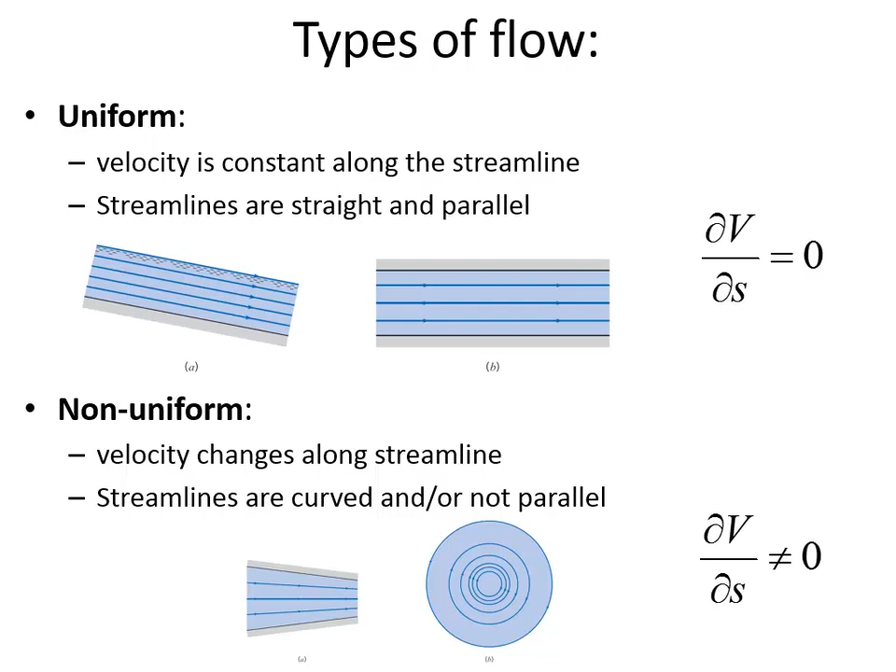Okay? Some of the lessons we learned about steady versus unsteady flow still apply here in open channel circumstances, where steady flow is the...

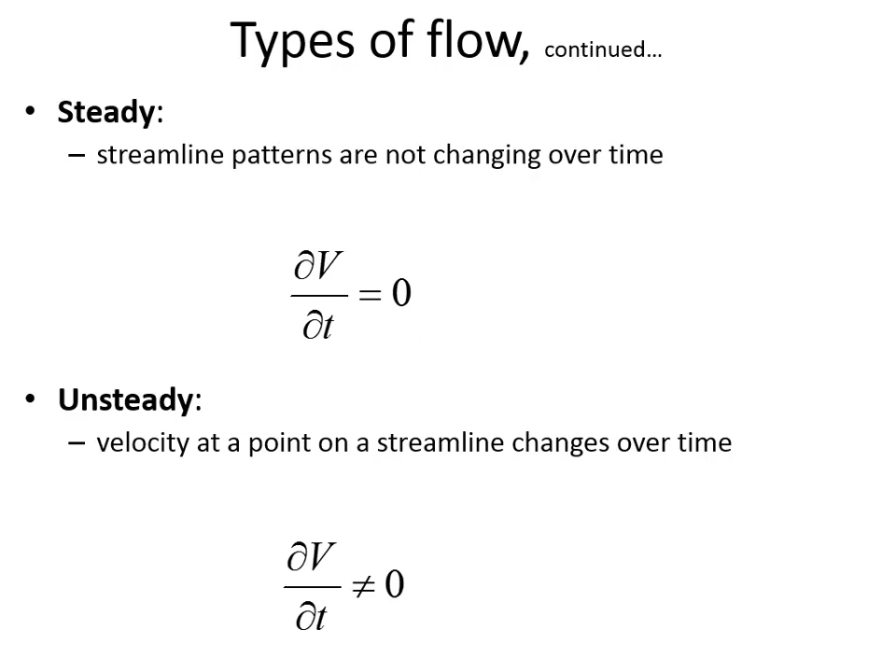constant flow with respect to time, meaning that the velocity is the same, the depth is the same now as it will be at some point in the future. It means the flow rate is steady, things aren't changing over time, versus unsteady flow.

So here's an image that depicts, for open channel, the difference between the flow condition at the beginning of some interval where a culvert's starting to be washed out and the road above the culvert is starting to collapse into it.

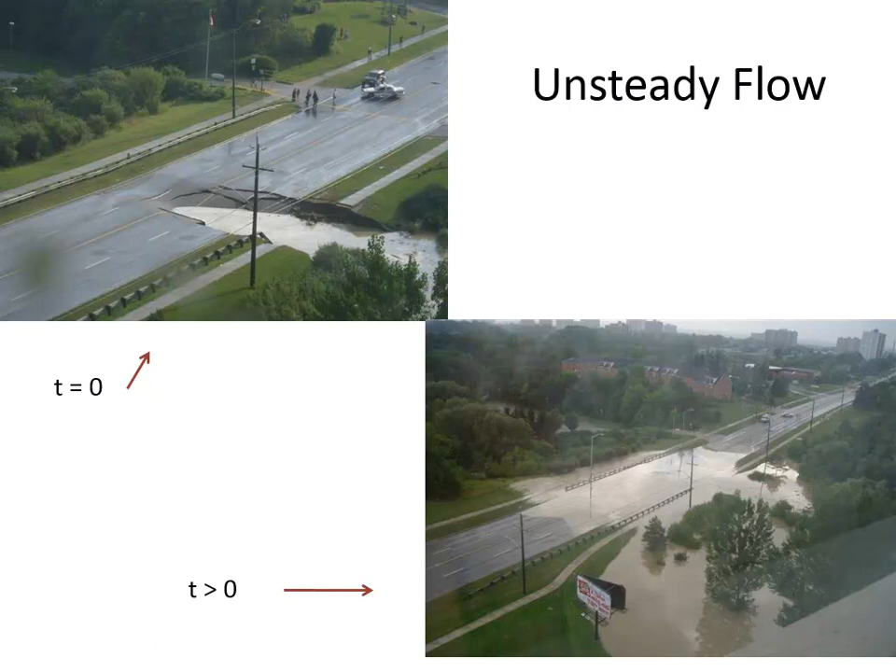And then sometime after that event, after the water has completely damaged the bridge and there's no more pavement going over there. So unsteady flow means that the flow conditions changed over time.

Now channel types - there's a couple of different channel types, and the first of these is prismatic. In a prismatic channel, the cross-section is regular. It's easy to characterize because usually it has some sort of a shape we're already familiar with. A rectangular channel is prismatic.

Now compare that to a non-prismatic channel, where you do have variations in any one of these or in all of them - variations in the shape. Think about the Ohio River and how there are little islands at certain spots and the depth is changing. At one section it may be deeper than the other.

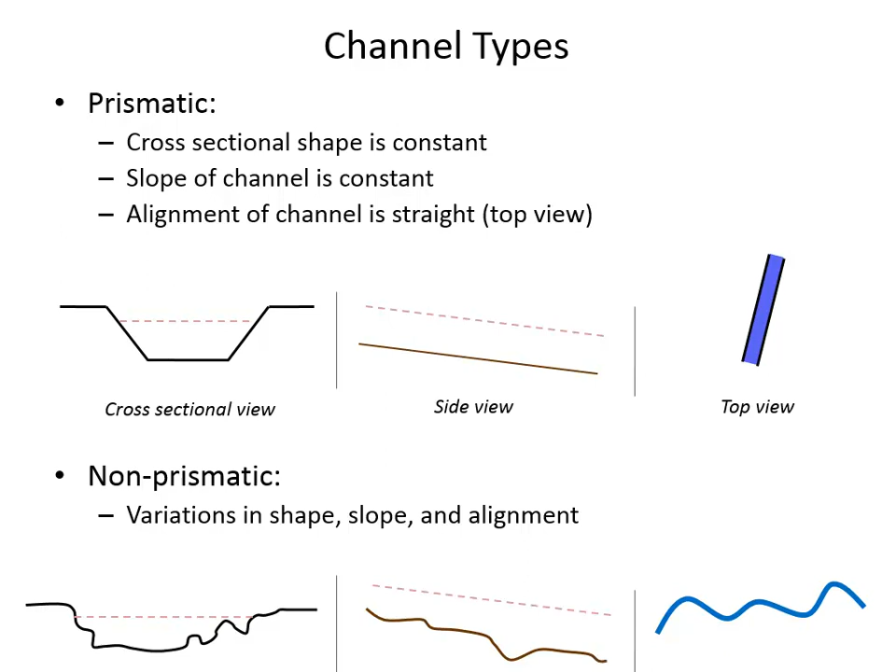For a rectangle, obviously, it's going to be the width times the depth. We've worked with trapezoidal geometry before, and we've talked about how the side slope of a trapezoidal channel has this parameter t, where t is the horizontal component of the side slope, where 1 is assigned to the vertical component. So if t equals 1, that means the side slope is at a 45-degree angle.

Some of the more challenging geometries to work with would be a circular conduit that's only partially full. We will get to the geometry of a circular, partially full conduit when we're doing sewer design, because if you think about a sewer pipe that's circular, it's not always full - in fact, it's very rarely full. It's extremely bad news if the pipe's all the way full in a sewer, because it means the pipe is pressurized, and a pressurized sewer pipe is going to leak backwards into people's basements and yards. So the geometry of a circular, partially full channel is hard to deal with, but we'll get there.

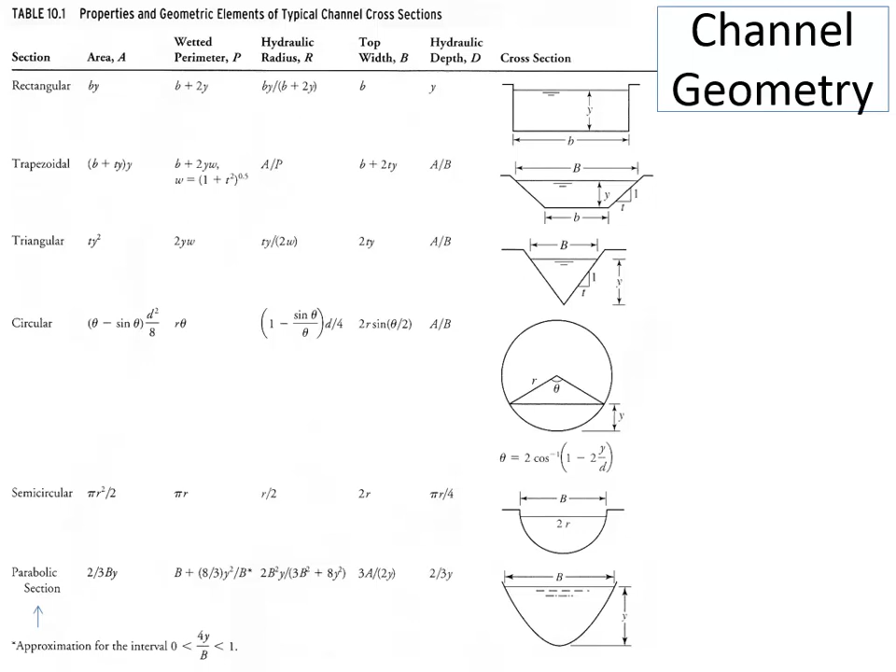So if you said that there is a trapezoidal channel, usually it would say the channel has a 1 to 2 side slope, and they may not even say which is the 1 and which is the 2. It would almost go without saying that 1 is the vertical and 2 is the horizontal, because you wouldn't have a trapezoidal channel that's really steep with a 2 to 1 ratio. Especially for a soil-lined channel, that would simply be too steep. So vertical, horizontal, where T is what we are calling the horizontal component of that side slope.

Okay, so what did we talk about? Ways to classify flow: we classify flow as uniform or non-uniform, as steady or unsteady. We can classify the flow going through a channel as prismatic or non-prismatic. Previously, we've already learned about laminar flow versus turbulent flow.

And you can do the same thing in open channel flow, classifying it as laminar or turbulent. So consider a stream where... I'm very proud of the sequence of animations here. It took me hours a couple of years ago, but still, it took me hours. So tell me it was worth it.

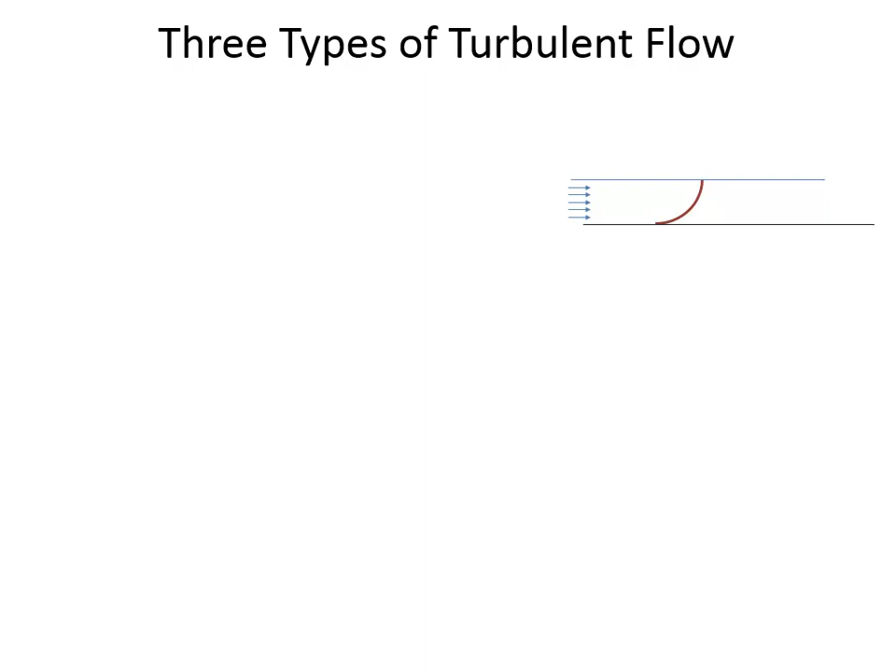And the Reynolds number below 2,000 means we've got a laminar zone. So why is it that we have a laminar zone close to the stream bottom? Because it's held back. That's the key: the velocity is low at the bottom of the channel because that's where the resistance is. The further away you get from that resistance as you go up through the channel, the higher the Reynolds number gets. At the bottom of the channel, the Reynolds number is 0, because right at the very bottom the velocity is 0. But you can go up some distance and still have laminar flow.

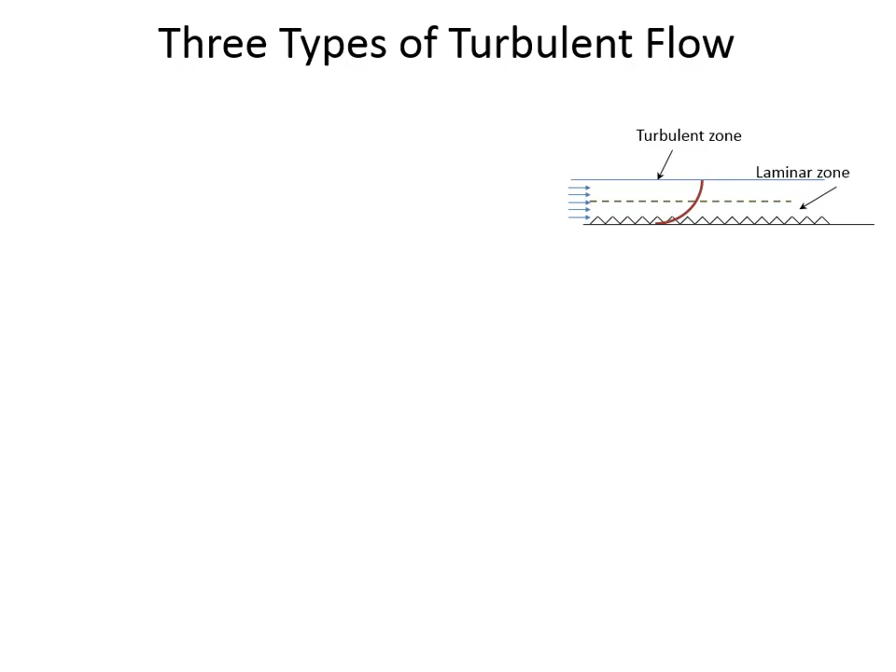So there are these roughness elements that project into the flow. It's smooth turbulent flow when the Reynolds number overall, the average Reynolds number, is turbulent, but whatever projections we have are fully cushioned and encompassed by the laminar zone. Transition is when these roughness elements are at the same height as the boundary between the laminar and turbulent zones, and rough turbulent flow is when the roughness elements project into the turbulent zone.

Later on, whether it's smooth turbulent flow or rough turbulent flow, those classifications will help us understand how the water behaves as it flows from point to point, how the depths may change. So this is just an introduction to different types of flow, and I've thrown that slide in there to remind you that if the roughness elements are fully cushioned by the laminar layer, the flow above it behaves differently than if those elements project outside the laminar layer.

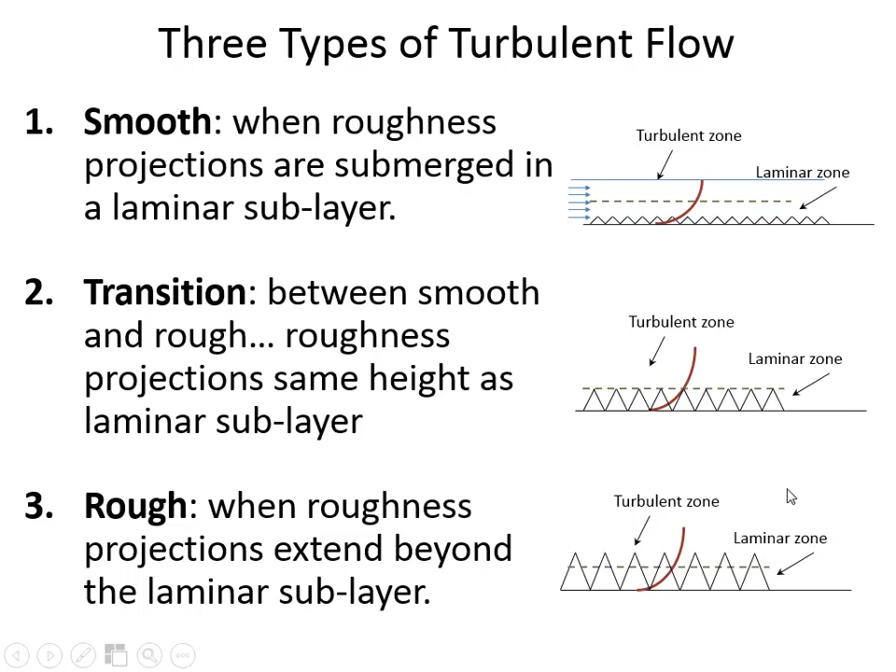Okay, so we're talking today about similarities and differences. The similarity is that we still have many of the same tools we've used till now. We still have the continuity equation. I already mentioned that the bulk of your homework problems are somehow applying the continuity equation.

So in an open channel environment, say you've got a rectangular channel, and they say the velocity of flow is 1 meter per second, into the page. The water's moving along at an average velocity of 1 meter per second. If you knew the channel bottom width is 2 meters and the depth of water was 1 meter, then the area is 2 square meters. So the flow rate is VA, which in this case would be 1 meter per second times 2 square meters.

So Q is 2 cubic meters per second. Continuity still applies in an open channel. Area is just the cross-sectional flow area where water is present.

Sometimes the tricky thing is when they give you the flow rate and the channel width, but they don't tell you the depth. So sometimes you'll be solving for some component of the area. If they said flow rate is 2 cubic meters per second, and B equals 2, but what if the depth is unknown?

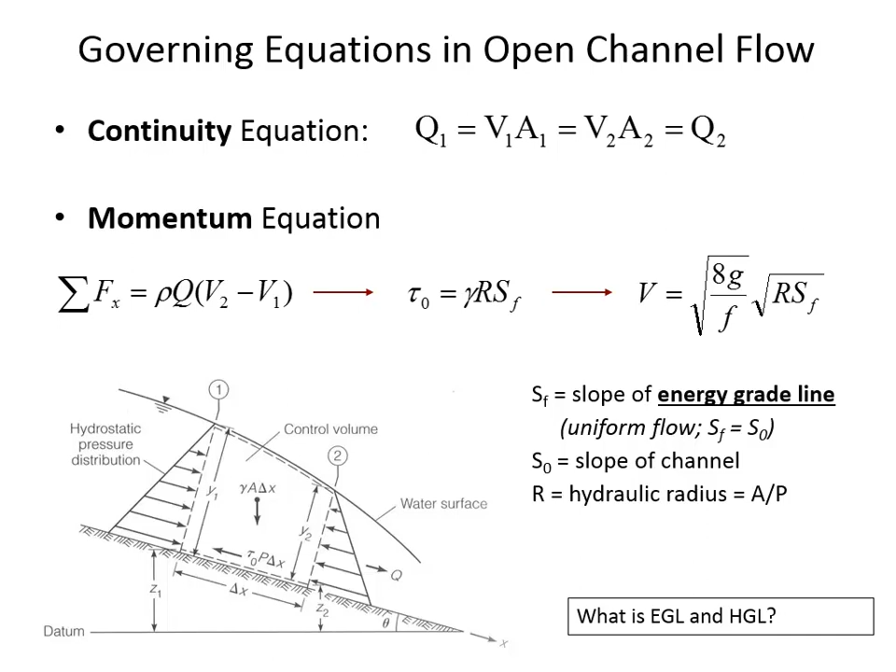The energy equation is the third and final primary fundamental equation that we apply in open channel flow. And there's some differences from the way that it's applied in a pipe versus an open channel. In a pipe where water's confined in a conduit, the water is pressurized. In a channel that's open to the air, the water isn't pressurized any longer.

So we're not going to have pressure head when we transform the energy equation for use in an open channel environment. We also don't have pumps in the same way that we do for closed conduit flow. So if we translate the energy equation for use in open channels, what we were calling the pressure head, instead we're just going to have the flow depth. Velocity head is still there. And Z, which is the elevation above some datum, is still a part of our thinking.

You'll notice there's no pump head term. And also, here I'm saying H sub F instead of H sub L. H sub L included 2 components: local losses and friction losses. But there aren't local losses in the same way for an open channel that there are for a pipe.

Like a valve that would close off, or a pipe bend—you don't really have those same sorts of things in an open channel. There are transitions in width and there are steps that can take a little bit of energy out, but we usually handle them separately, so they're not included in the energy equation in the same way that we throw local losses into the energy equation for pipes.

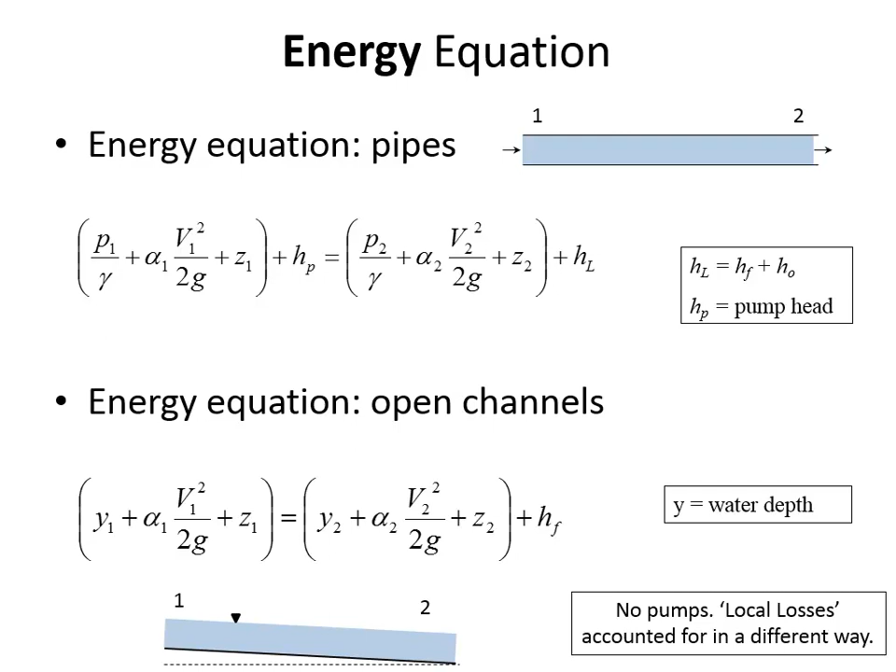Are we still going to leave alpha out? Yeah, we usually won't bother calculating the kinetic energy correction factor alpha, so alpha equals 1 for our purposes. It's only when we have truly laminar flow and a parabolic velocity distribution that alpha is 2, in the case of closed conduit pipe. But in open channel, alpha really never would be 2, regardless of the flow rate, because it's open to the air at the top, so it won't have a parabolic velocity distribution. So alpha will be 1.

So in summary: continuity, momentum, and energy.

Momentum gets changed around. Remember, we did a force balance, and I said that factors into how we find out the energy loss - how much energy is lost as the water moves from point to point. That's a momentum type equation, and we can think about it in terms of Darcy-Weisbach, where F is referring to a friction factor.

But more commonly, we'll use what's called the Manning or the Strickler equation. I'll call it Manning for the rest of the semester - this is the only time I identify it as the Strickler equation. The Manning's equation has, remember, a simpler n value that doesn't vary with flow velocity, and somehow that's less of a problem in open channel flow. If we wanted precision in pipe flow, it's really important for us to have an F value that changes with flow conditions. We didn't get as good results when we used the Manning's equation or even the Hazen-Williams equation in closed conduit flow. But Manning's equation is okay for open channel.

It's not as precise. Open channel calculations are inherently less accurate than closed conduit calculations, and maybe that's why we don't worry so much about the fact that the n value is constant.

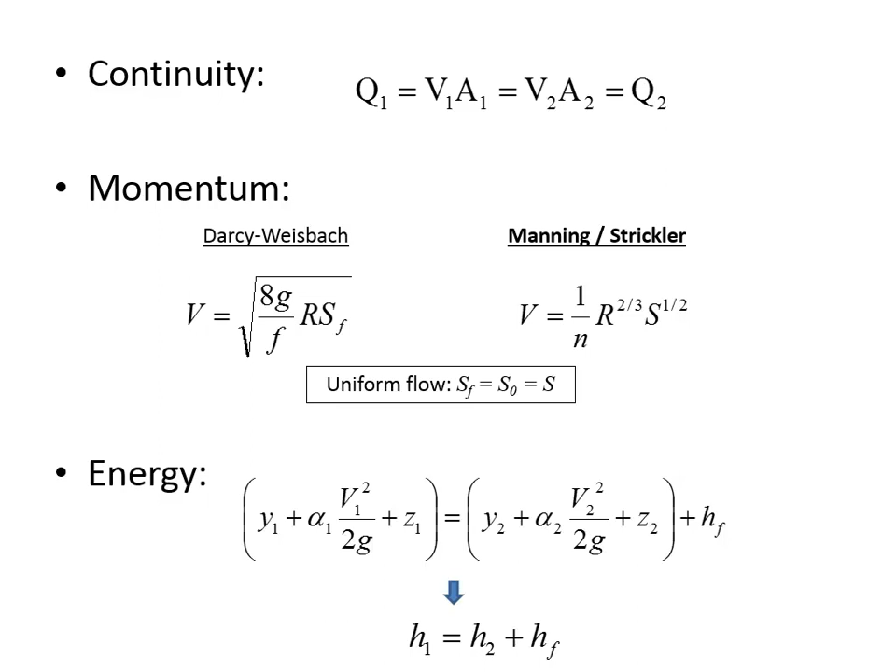I had the hardest time understanding when I could use the Manning's equation when I was an undergraduate student. I guess I didn't pay attention enough when we were talking about steady, uniform flow classification and flow visualization. I was tuned out during that lecture, and then I didn't know when I could and couldn't use Manning's equation. You can use Manning's equation when all three of those slopes are equal. I'd see S in here and say, well, which S is it? It's any of the three because they've got to be parallel to use it.

Okay, here's a little example that we're going to take a look at. I phrased this problem very similar to how one of the problems from your homework is phrased.

Water flows from 1 towards 2. 1 is always upstream, upstream, downstream. Sometimes we talk in terms of headwater and tailwater. Usually we use those phrases when there's some sort of an obstacle or obstruction in the water causing non-uniform flow. But even here, when we do have uniform flow, sometimes people will say headwater and tailwater. Headwater means upstream, tailwater means downstream.

At 1, the riverbed is 0.782 meters above the datum. So here's our horizontal datum, and the elevation of the riverbed above that datum is given, 0.782 meters. And the bed width is 0.5 meters, talking about the width of the channel, lowercase b.

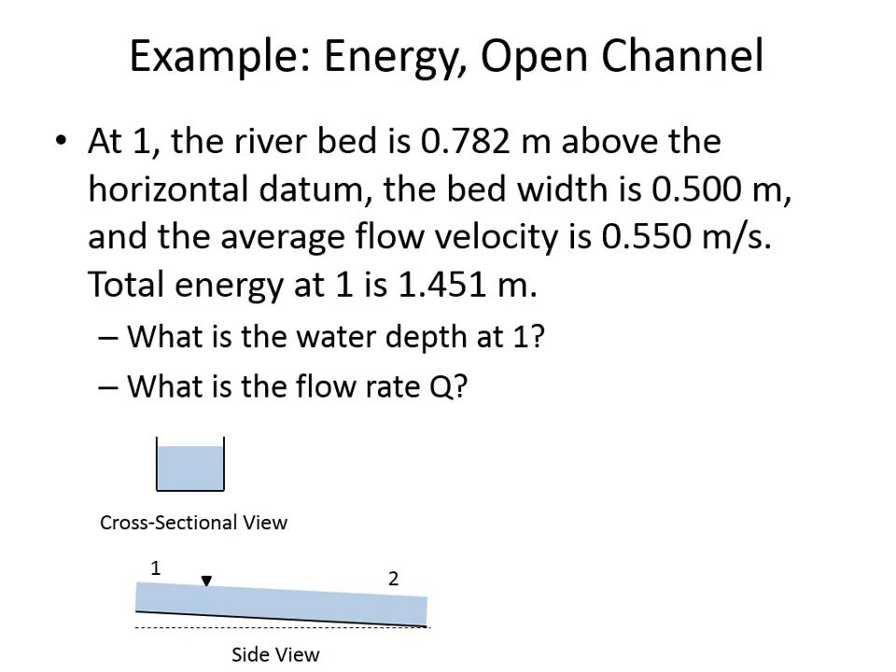Okay, this is a question that came up as you were preparing for the exam. Remember, we talked about how the horizontal length of the pipe and the inclined length of the pipe aren't the same, but they are so close that it really doesn't make sense for us to keep track of the cosine of the angle. The same thing is true in open channels.

So if you consider a certain length of the channel, L, as an inclined length, where delta Z is the elevation difference—the upstream end is that much higher than the downstream end—then the angle is usually so small in open channels.

A steep slope in a channel would be a 2% slope, or a 3% slope would be quite steep. More commonly, the type of slope for a river would maybe be 0.5%.

Those slopes are so small that the cosine of the angle is going to be 0.999, very, very close to 1, so the length and the inclined length are essentially the same. So we won't bother to differentiate when I say that

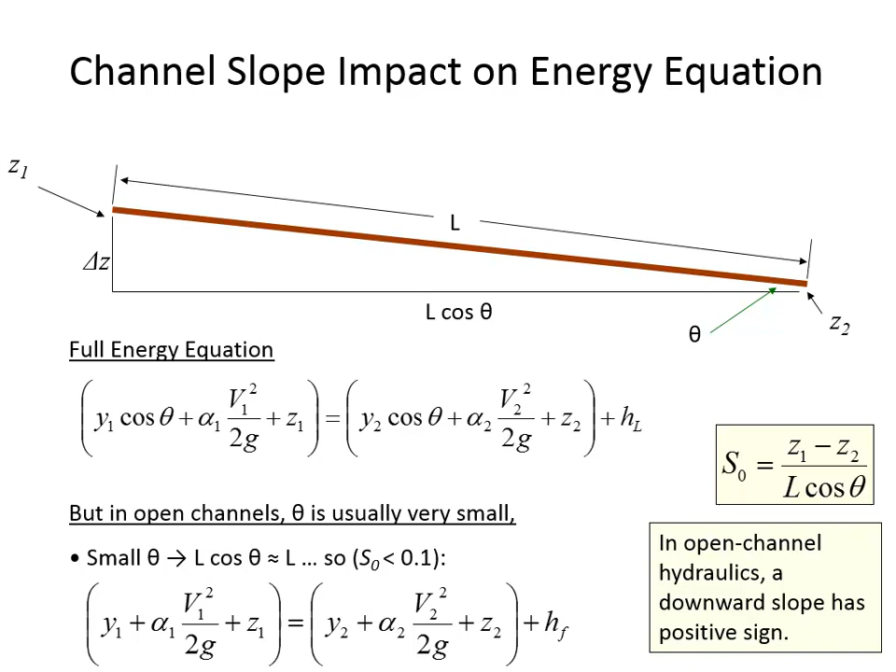You have another problem that asks you to define the flow regime. Frankly, I'm not exactly sure why they introduced that phrase in Chapter 10, because it's a concept we really don't get into detail until Chapters 11 and 12.

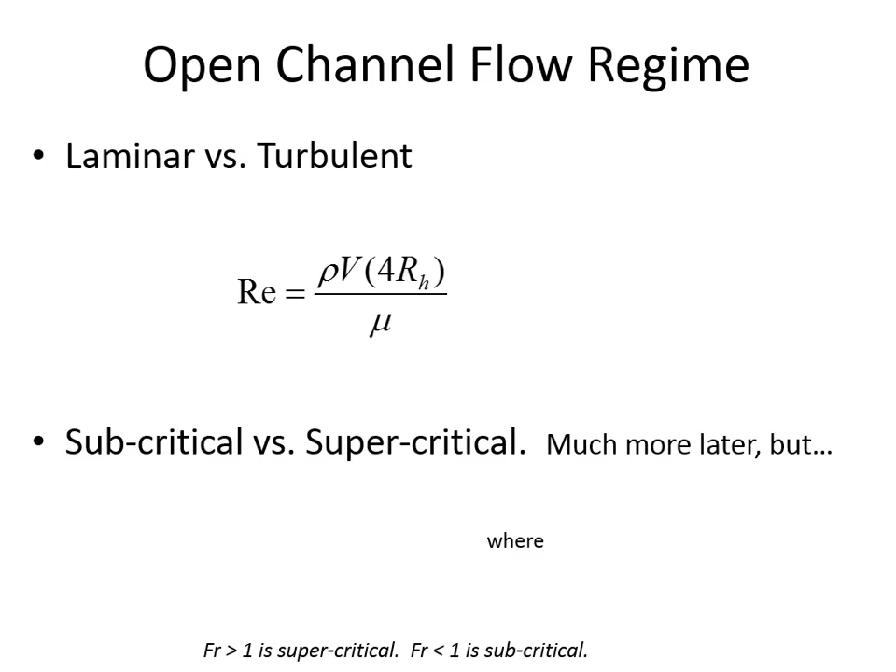But it's easy enough for me to remind you, first of all, that we have the equation to characterize whether flow is laminar or turbulent. When you don't have the diameter of a pipe, remember that in place of diameter, we use 4 times the hydraulic radius to calculate the Reynolds number.

Now, this other thing is a little bit more tricky: subcritical flow versus supercritical flow.

Supercritical flow is characterized by a high water velocity, and usually you'll see supercritical flow when water exits an underflow gate, or comes down a very steep spillway. We'll watch some videos of supercritical flow.

Did I show you video from a dam, that Oahe Dam? Yeah, they opened up those big jets of water. Okay, so that was supercritical flow—water with an extremely high velocity.

Subcritical flow is characterized by lower velocities. This number is called the Froude number, this equation FR. It's similar in concept to the Reynolds number, where it doesn't really have units, but when it's less than 1, you have subcritical flow. When the Froude number is greater than 1, you have supercritical flow.

So in that homework problem where they ask you to classify the flow regime, they're asking: is it laminar or turbulent? And is the flow subcritical or supercritical?

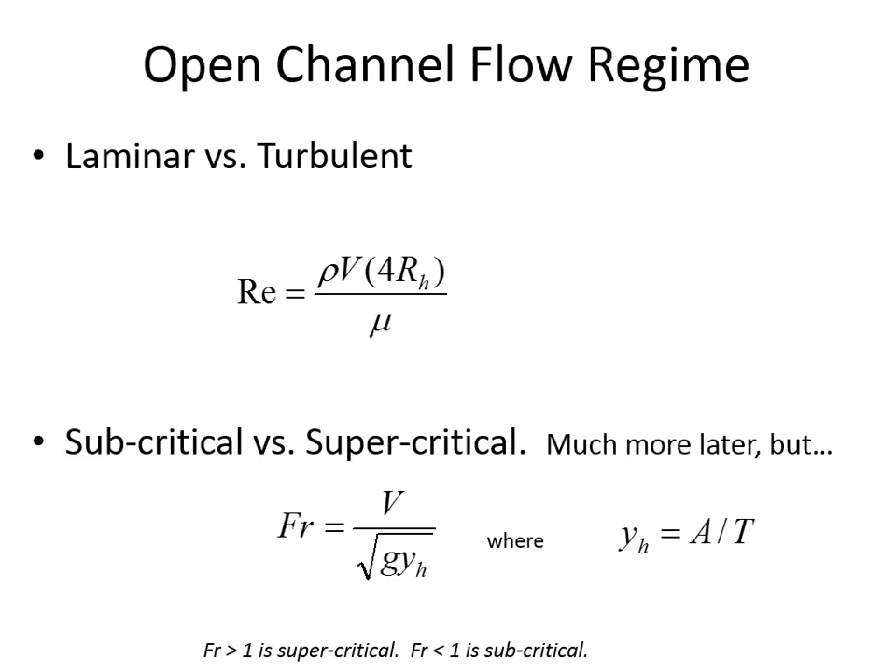I would like you to refresh your memory on how to use trapezoidal geometry and calculate these terms. I'll give you the formula for the section factor, but I'd like you to do the rest from your brain. We've done this before, but it bears repeating. Find the depth of flow based on the side slope they've defined, the cross-sectional area, the wetted perimeter, and hydraulic radius. Remember, hydraulic radius is area divided by wetted perimeter. Hydraulic depth is the same thing as Y sub H, the area divided by top width, and section factor.

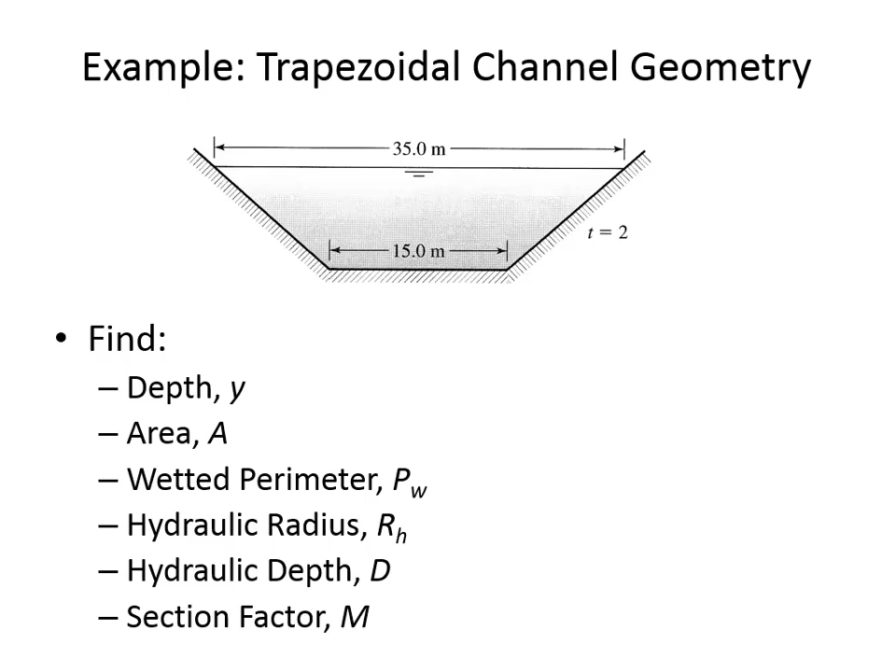All right, so let's take a few minutes to do that. Feel free to collaborate with one another.

Okay, so before we take a look at the exam key, are there any questions about the example or the announcements?

You want to talk about the homework for a second?

Well, let me bring this up on the document projector too, because maybe I can give you a better idea if I draw right on here.